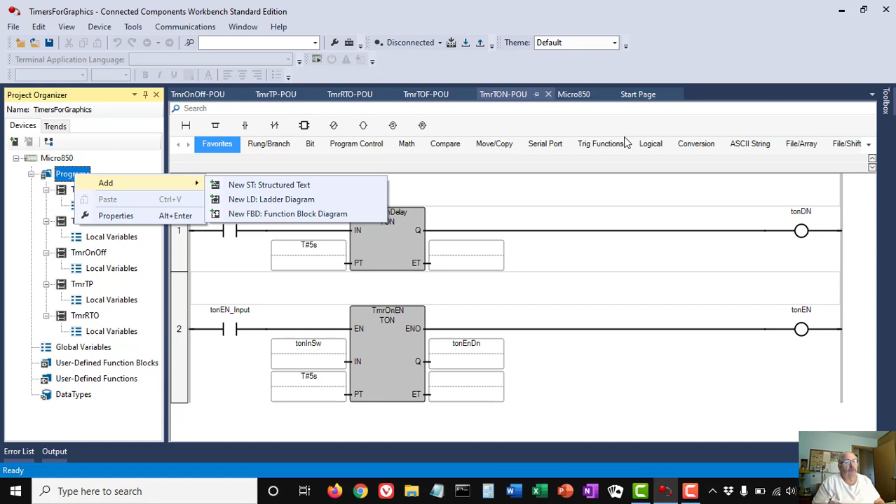In order to create these programs, all I did was I right-clicked on programs, said add, and add new ladder program. I won't do that because it's the same as what we did to create the very first one. In CCW, these programs are scanned in the order that they appear in this tree. There are no program control instructions.

If you're familiar with Studio 5000, you know that there are jump to subroutines, JSRs, there are returns, there are the subroutine label or the sub label. Well, in CCW, that doesn't happen. All of these subroutines are scanned in the order they appear.

CCW handles subroutines. In fact, they don't even call them subroutines, they're functions. And that's really the way things should be done. But anyway, they handle the routines based on functions. And in our next video, I'm going to cover creating functions.

Now, I can change the order in which these routines or programs can execute. I can take a program like RTO Timer and click on it and drag it and say, okay, I want this to now be the order. Or I can drag this one down and say, I want this to be the order, so that it executes in this order. But all 5 of those programs are going to execute.

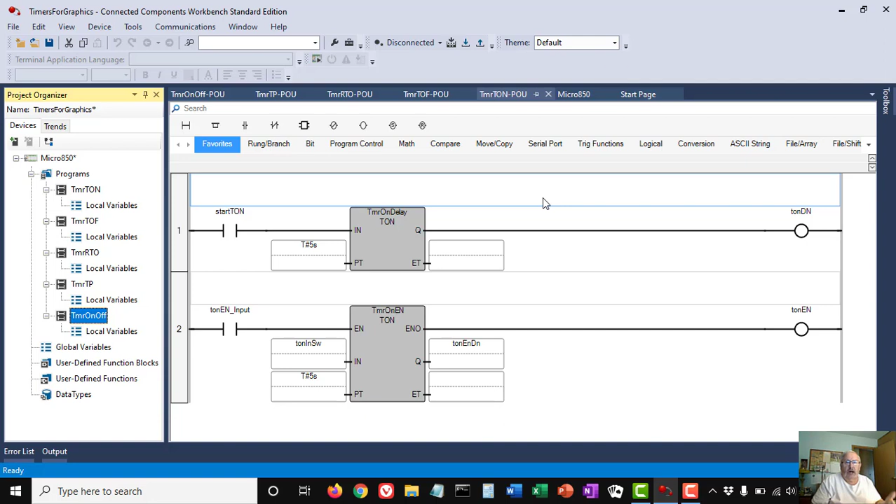Now, last time I said that I would show you how to access the Q or the done bit using the dot notation. So before I go online and demonstrate to you how the timers work, I'm going to add a rung in here, and I'm going to put a contact on that rung, and I'm going to use the dot notation to access the Q bit or the done output of this timer on delay.

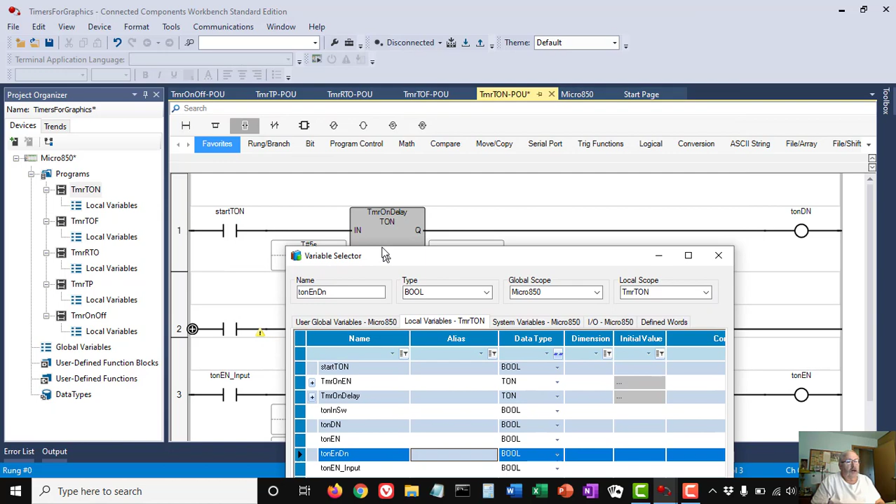Now, when you look at the variable selector, you'll not see that particular timer sometimes. If I come in and just click into the table, you'll see that they appear. So I want the timer called timer on delay, and I'll use the little plus sign to drill in. And here are the members of that particular timer object or timer instance. I want the Q. I want you to notice that you can also access the preset and the elapsed time.

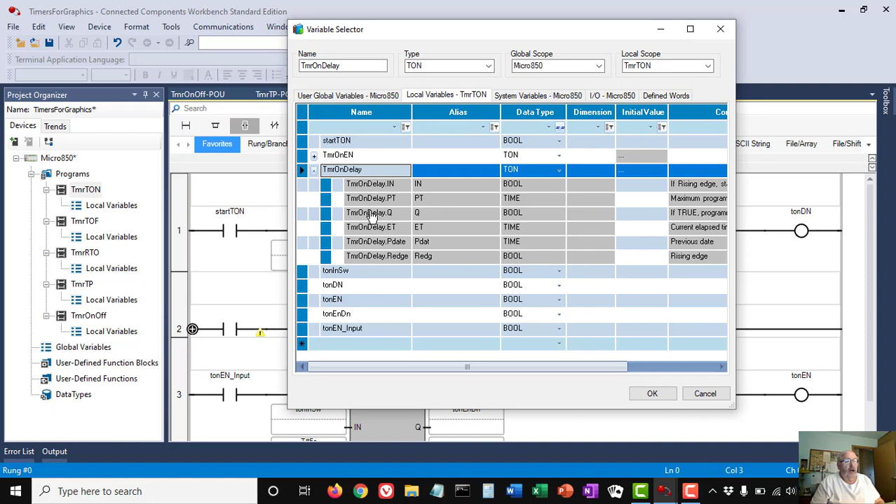So I want the Q. I'm going to click on Q and say OK. And now I've got timer on delay, which is the variable name for this TON timer, dot Q. And then I'm going to take this coil and move it down to this rung. Notice I just took it and dragged it down to a target, because now I'm going to use this as my done bit.

So that said, I'm going to now start my simulator. Make sure I've got the right connection to it. Let me turn it on. Make sure I have the right connection to it, which I do. And let's see, go back to timer on delay. And we've already demonstrated the timer on delays. Let me start downloading this. Oh, I clicked the wrong button, but that's okay. That's actually going to do the build first. Make sure there's no errors. All right, then I'm going to download it.

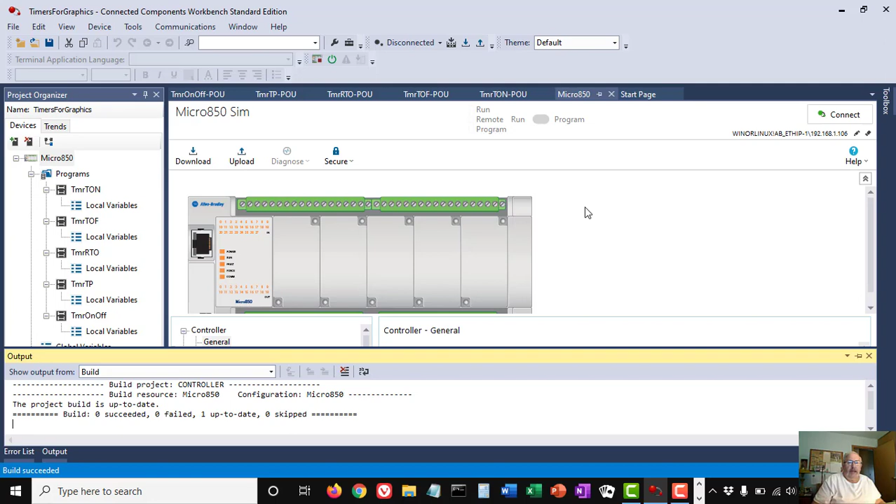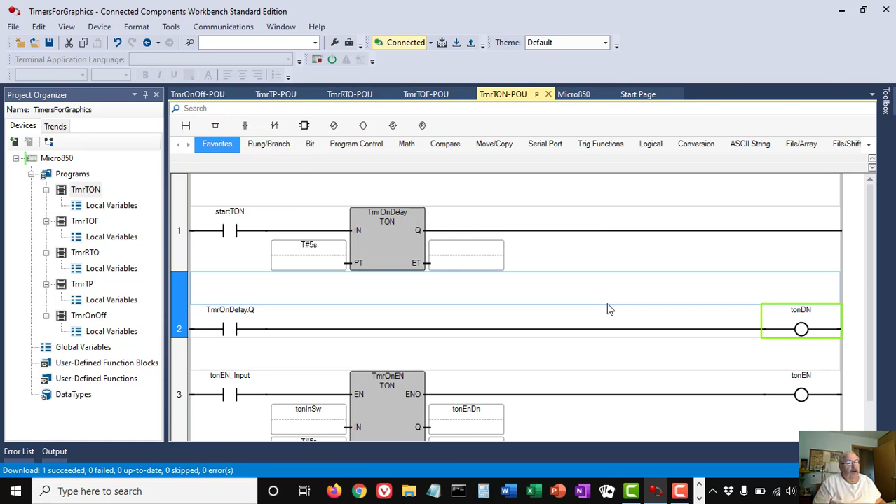So we've already showed you how a timer on delay works. The only reason I'm going to run it is to show you how the .Q bit works exactly the same as if I had a coil out on the Q output of this rung. So now, this gets online here, takes a little while. All right, we're online. I'm going to toggle this bit on.

The timer starts timing, and when it's done, this contact will close, which it does, and it turns on the output associated with it. So everything is the same as it was, only this time I used the dot notation to access a member of this instance. So let's go look at the TOF timers.

Now I can either double click on the program timer TOF over here, or I already have it open, so it's in my tabs across the top, timer TOF, and POU stands for Program Organizational Unit. If you don't remember how that works, you could go back and look at my other video to see how timer off delay timers work, or what you can do is click on an instruction that you'd like help on and then press the F1 key.

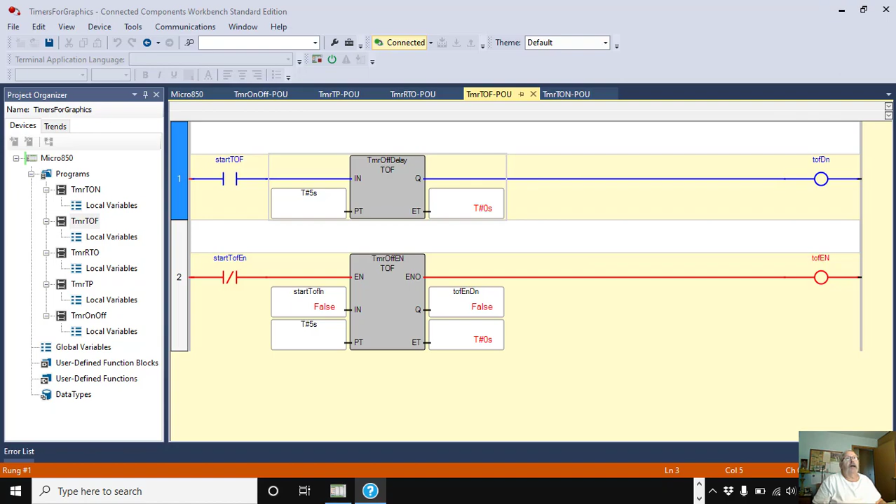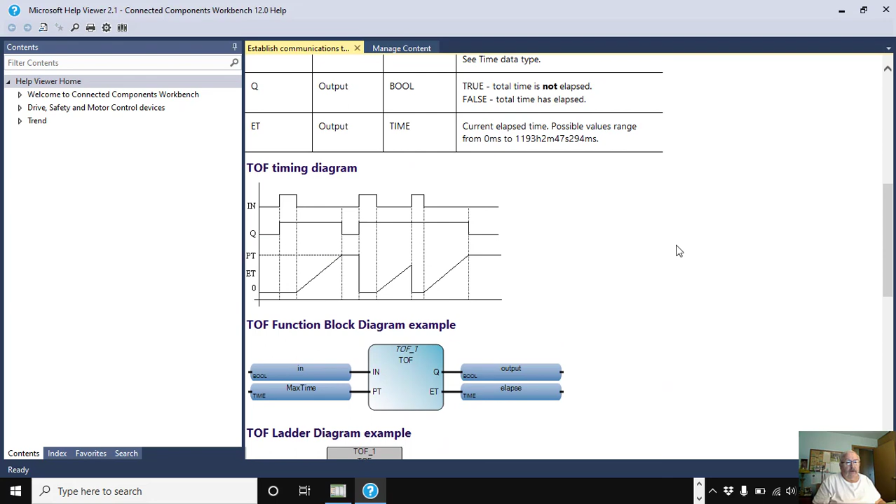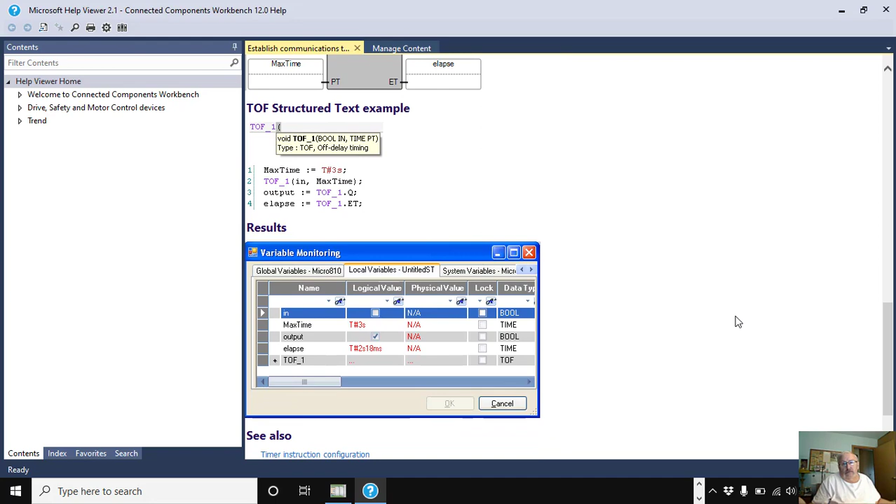When you press the F1 key, it brings up help on the instruction that you had selected. And you can scroll through this and get the help. There's the timing diagram you saw in our last video. It shows you how it's used in function block, in ladder, and in structured text. So it tells you how the instruction works.

So if you remember, timer off delay timers time when the timer input is false. And also it's a timer off delay, therefore the output or the Q will be on until the timer times out. Now on the very first time you do this, the input has to actually toggle to on. So I'm going to toggle this input on.

You'll see that the Q output is true. This output is enabled. This is the enable on. This is the timer off with an enable. And I'm going to toggle this in on, and you'll see that the done bit turns on. Now both of these timers work exactly the same. It's just one needs to be enabled and one doesn't.

So I'm going to now toggle this off. The timer will start timing, and at the end of the timeout, this done bit or this Q goes false. When the input goes true, the timer resets and the Q output turns on.

I'm going to use the Control T key on my keyboard to toggle this on and off. So I'm going to turn it off. It starts timing. I'm going to turn it back on, and it resets before it finished, just like the timing diagram says it should. So timer off delay timers time when the input of the timer is false.

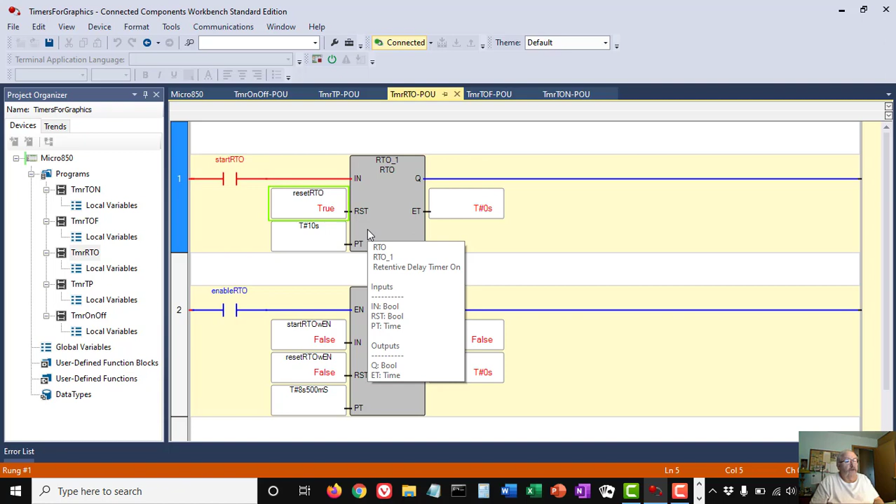So I'll click on that, and in this case I'll right click. I could use Control T again. Toggle. When the reset goes true, the elapsed time gets reset. Now if that stays true and I toggle this input on, notice the timer is not timing. And it's because it's constantly getting reset. So the reset has to go false, and if the input is true, it'll start timing. So a retentive timer.

Let's go to the TP timer. The TP timer is a pulse timer. And if you remember how it worked, when the in goes true, whatever the PT is set for, the Q will turn on for that length of time, no matter what the input does. So let me turn that input on, and you'll see that the output goes true. 2 seconds later, it goes false, even though the input's on. When I turn the input off, the Q stays off.

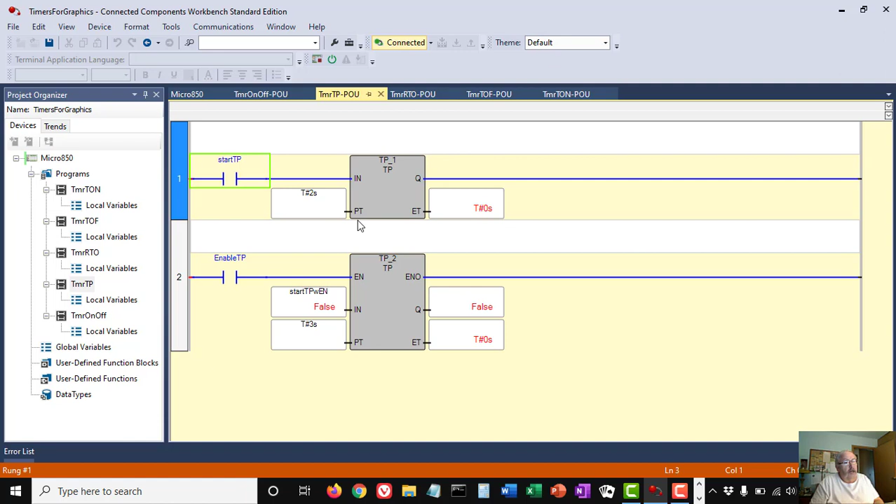I'm going to turn the input on, and then I'm going to turn it off right away to show you that this timer will continue timing until it reaches the 2 seconds. And it's continuing timing at 2 seconds, or whatever your preset value is. So this created a pulse for the length of the preset when this instruction is true.

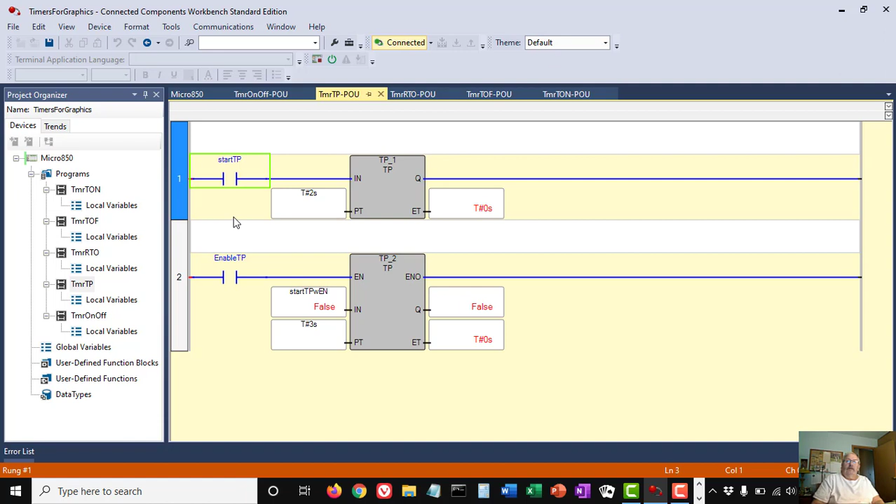One last timer, and that's the timer on off delay timer. And this timer has a preset for the timer on delay portion and a preset for the timer off delay portion. So it works the same as a timer on delay timer and a timer off delay timer. When this input goes true, the timer will start timing. When it reaches the 5 seconds, the done bit turns on.

When I make it go false, the timer starts timing. The done bit's on until it reaches the timer off delay timing. So you could perform both functions on this one timer, depending on the status of the in.

Okay, that's all I'm going to say about timers at this time. Those of you who are used to using the Studio 5000 software, you'll find that other than these 2 additional timers, they work exactly the same way. Those of you who are new to PLC programming, you might want to pause this video at certain spots and duplicate what I have on the screen, or create your own timer program so that you yourself can watch how they actually work.

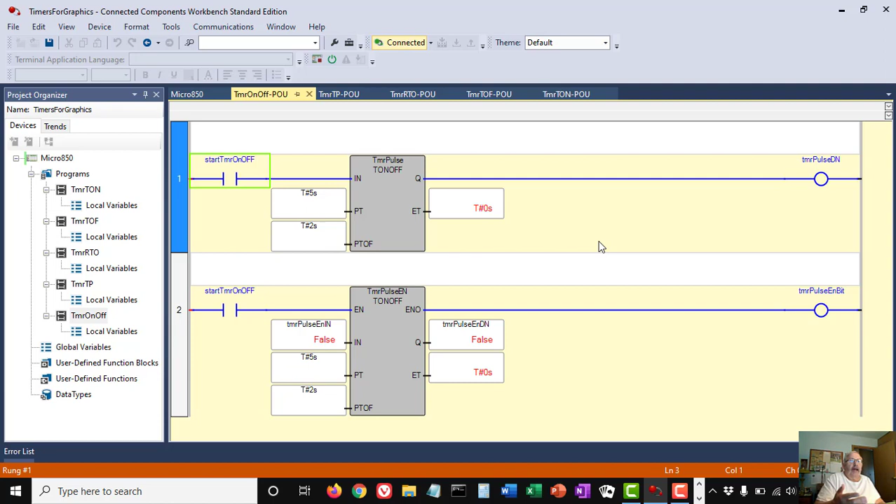One last thing before I leave this video. I'm going to go offline. I'm going to turn my simulator off just to show you something that I did not show you last time. I've been using one particular value in these presets. I can go into this preset, and let's say I want 2 hours. I can do this. I can say timer.

Timer. I want 2 hours, 33 minutes, 16 seconds, and 54 milliseconds. So I can string it together. I can make any time I want just by telling it how many hours, how many minutes, how many seconds, how many milliseconds. And if I don't have milliseconds, I just don't include it. If I don't have minutes, I don't include it. So I think it's very powerful, and I don't have to think about converting a number into milliseconds. All right, that's it for this video.